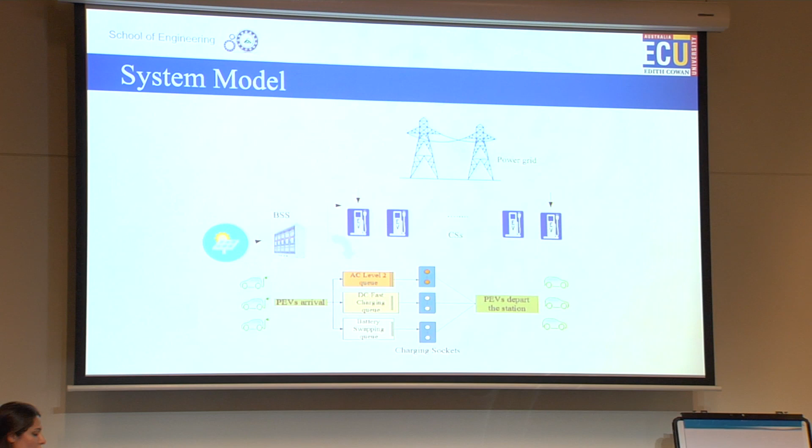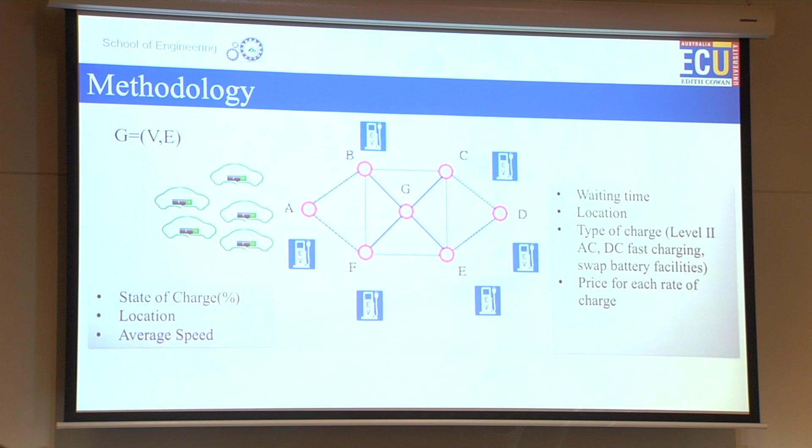As a mathematical representation of the system model, I consider the set of charging stations as a graph G(V, E), where V are the charging stations and E is the path, the distance between neighbor charging stations. On the charging station side, at real time I have this information: the waiting time of the queues, the address of the charging station, which is its location, the type of charge, which is related to the rate of charge for each option, and the related price information for each type of charging, AC, DC, and the battery swap also has a specific price.

And on the EV side, we have the state of charge of the EV, its location, and the average speed to calculate the remaining energy capacity of the battery for the distance from the source to destination.

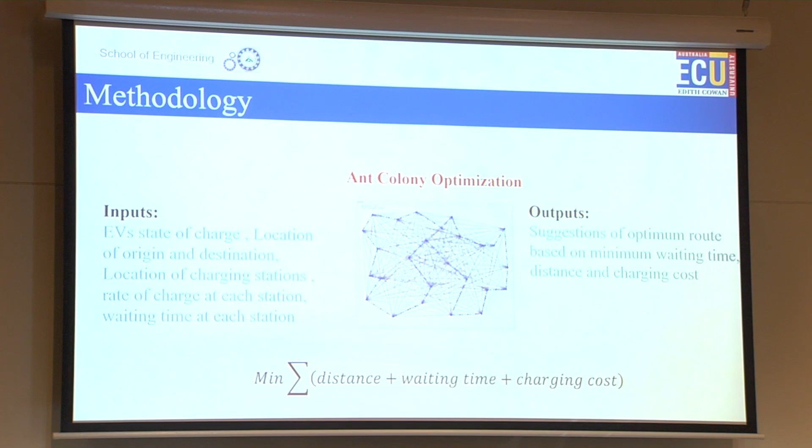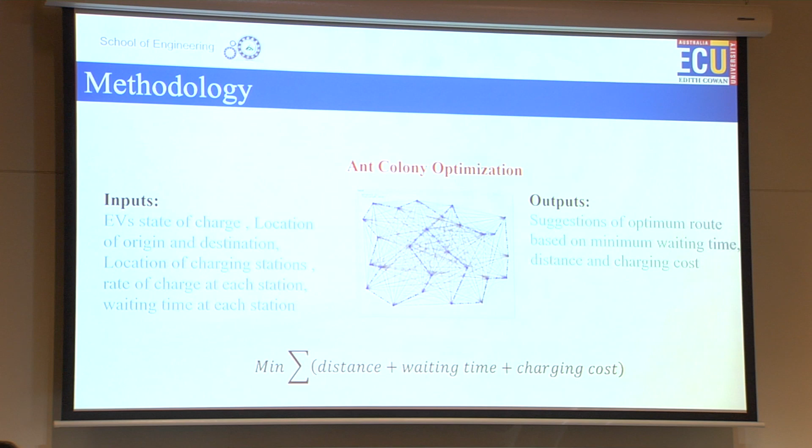The main objective for this part of my project was finding the optimum path based on the minimum waiting time at charging stations plus minimum distance from source to destination and minimum charging cost. For this, I have used an optimization model, and for solving my optimization problem, I have used ant colony optimization, which is a path-finding optimization solution that finds the best near-optimum path for different EV drivers when they want to go from the source to destination based on their selection of the charging type.

So as an input of the system, we have the EV's state of charge, as I said, in the EV's panel, and we have the source and destination, because based on that, I have to decide what would be the best option. And also we have the real-time waiting time for charging stations, implemented by a queuing model, that at each time slot is changing because of the number of EVs at charging stations. And on the output side, we would have the suggestions for EVs for the best option to go and charge.

For my simulation for this part, I have used the EV network from Washington because it was somehow similar to my system model, and in most of the charging stations they have used AC and DC for charging EVs, with multiple sockets for charging. I just added the swap battery for the charging station in my system model.

And the reason is that it's somehow a coordinated charging. So besides the random charging, going to the charging station only based on the distance, we can manage EVs to go for the best option.

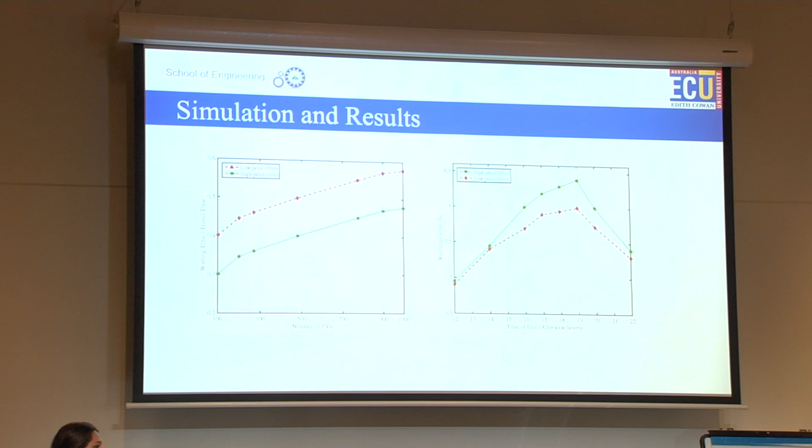Also, we propose a partial charging strategy at this stage, and we said that we can suggest EVs, instead of full charging at the charging station, especially at peak hours, go for partial charging with a higher price, but with less charging time, to decrease the waiting time at charging stations.

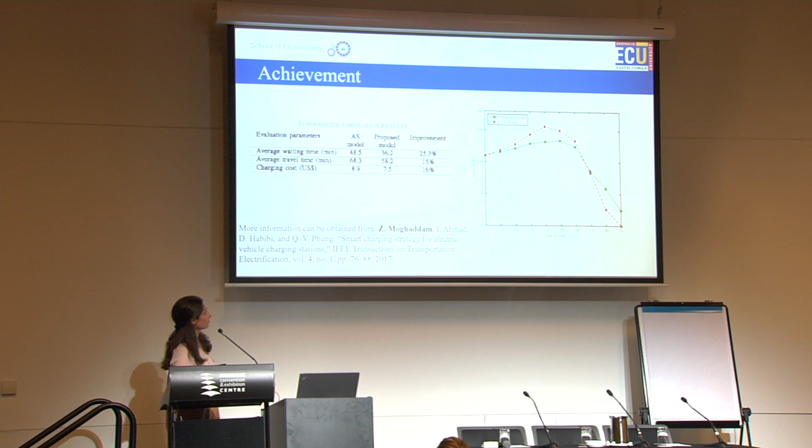And as the main achievement of this part of my project, we could decrease the total waiting time at charging stations by up to 25%. And we could decrease the overlap between the charging load and the load curve at peak hours.

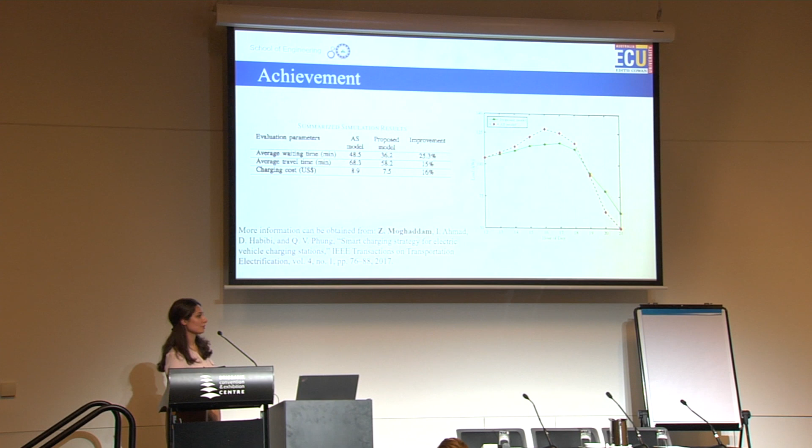This phase of my PhD has been published in one of the highest journals in electrical engineering, and for more information you can go to this link. And the good thing is that since last year, when it was published, it's been one of the top 5 papers in this journal.

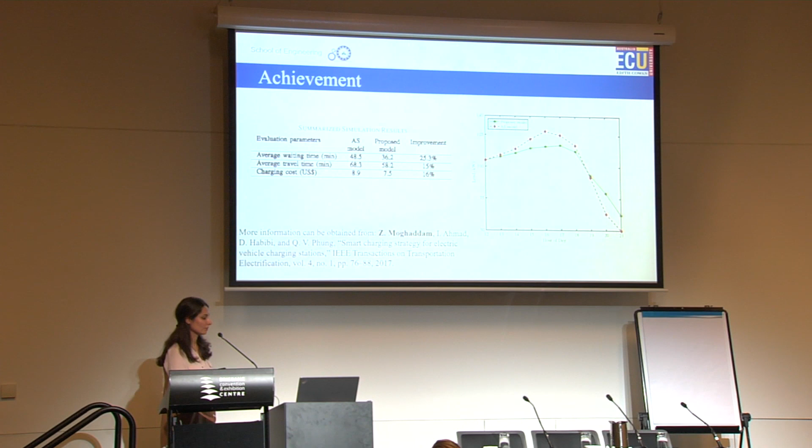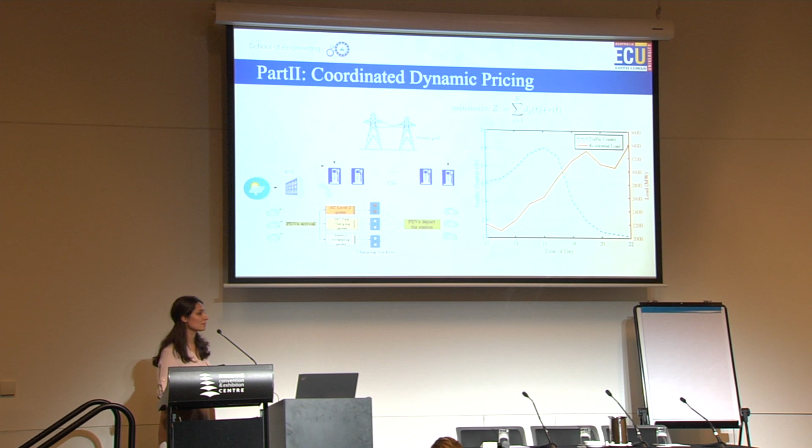For the second part of my project, I followed the same direction, to minimize again the overlap between the EV's load and the residential load at peak hours. The only thing that I have changed in my proposed model is the price of charging stations. And for the price of charging stations, I propose a coordinated dynamic pricing. For the coordinated dynamic pricing, I've considered rule-based instructions for the pricing model,

and the rule-based instruction follows the uniform distribution of the EV's load across all charging stations based on the maximum capacities of charging stations, especially at peak hours. And again, for the input of the system, I have the current time, the price of the current time, and the price of one hour before. And the price was changing every 30 minutes. It was online dynamic pricing.

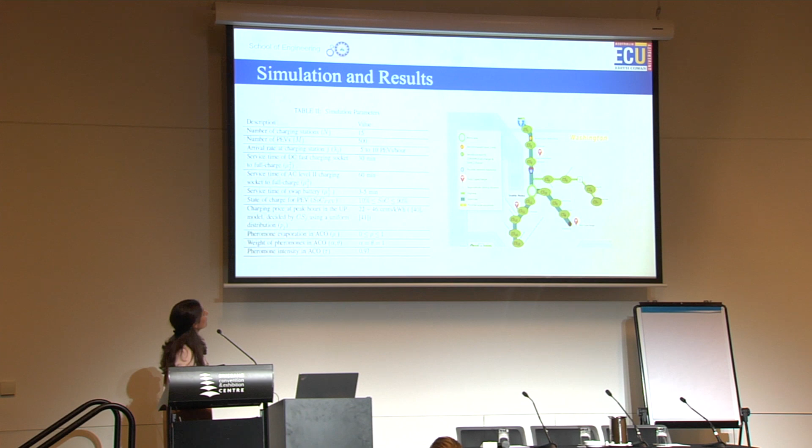Again, for the path finding at each time slot, which is 30 minutes, we updated the price information and found the best option for charging stations to go and charge. Again, for the simulation of this part, I have used the green highway of Washington, but for 15 charging stations and 500 EVs, and with the other parameters of the simulation I have got these results for this section.

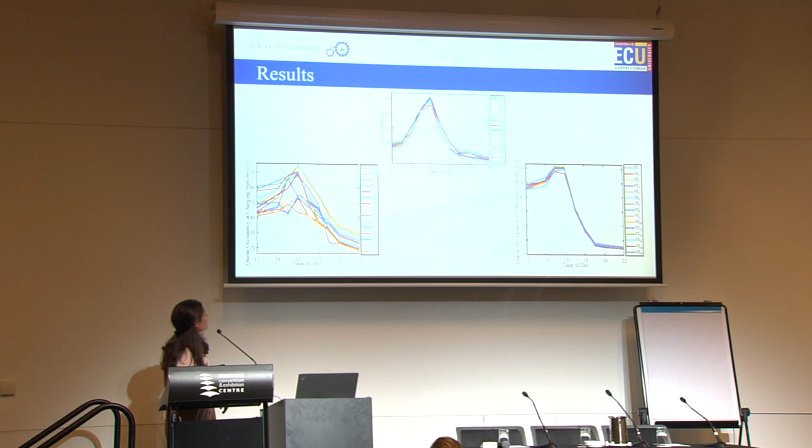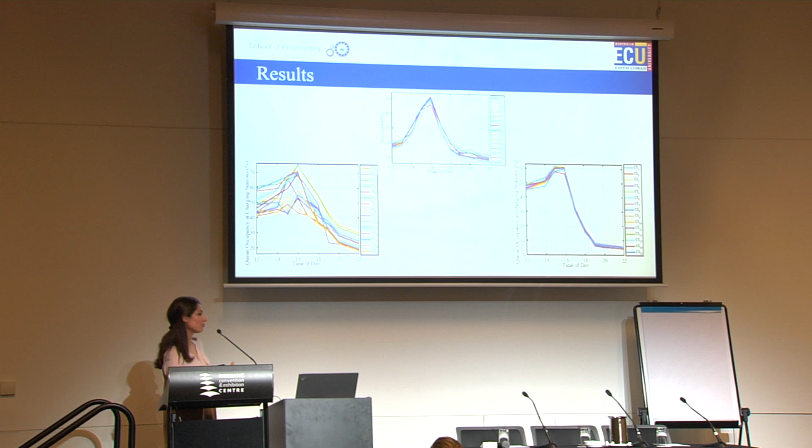The left graph is based on the queue occupancy of charging stations with an uncoordinated pricing model. As you can see, the price information is different at charging stations at different times of the day. But on the right side, I could achieve the coordinated dynamic pricing for charging stations, and this queue occupancy between the charging stations, as you can see, follows the uniform distribution for EVs, and they could charge before reaching the peak hours in the afternoon.

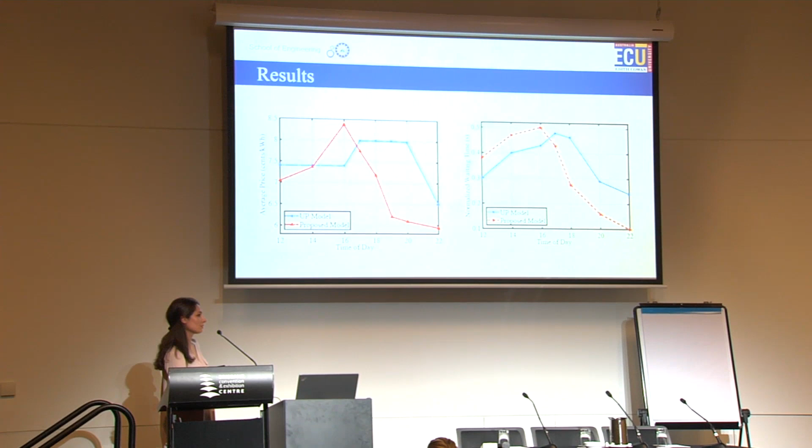And also for the average price, we could get the minimum average at peak hours, and for the waiting times also, as we charged EVs before reaching the peak hours, based on the pricing model, we could get minimum waiting times.

And for this section, I could achieve up to 67% of the average EV load during evening peak hours, which was significant compared to the existing results, and the probability of the overlap, I could improve it up to 46. Also, for this part of my PhD project, I could submit another journal paper, which is still under review.

As a summary of my PhD study, I can say that we propose a smart charging strategy which considered multiple options for charging EVs at each charging station with different price information for each charging option. And we also use optimization. We defined our research question as an optimization problem, and for solving that optimization problem, I have used a heuristic solution for finding the best path.

And for the verification, as I said, I verified my result with one of the best existing results in this area, and the simulation environment was MATLAB. Thank you for listening.

So a really quick background. I'm going to assume that everyone is pretty familiar with how batteries work. Hopefully that's a safe assumption if we're at an EV conference. But to compare the battery with the fuel cell, they're actually extremely similar. They're both electrochemical processes. The big difference is that with the battery, you have all of the fuel stored within the cell. And with the fuel cell, on the other hand, you simply keep adding your fuel as you need it, and you store that elsewhere.

And so with the hydrogen fuel cell, you store the hydrogen in a tank, and oxygen you most often take from the air. So that means that with the battery, if you want longer range, you have to put all of the components of the system in, like battery after battery after battery. And the fuel cell, if you want longer range, you just have to make the tank larger. So that's really a big distinction, that you can really decouple the power from the range.

So if we start to try to compare them side by side, in terms of what's important for mobility applications, you look at batteries: the fuel's widely available, even at home, and this is really the big driver for why EVs have been taken up so easily, because you need that charging network to go far, but the reality is you can meet 95% of your needs just charging at home and driving somewhere and coming back.

Whereas with fuel cells, you need to find somewhere that will provide you the hydrogen. And hydrogen is quite challenging to transport long distances, particularly because it's extremely high density from a weight point of view, but being a very light gas, it's difficult to put a lot of hydrogen on a vehicle and transport it to the stations. In some places there are hydrogen networks, like pipeline networks, and that could be a potential for the future. But for the most part, you have to truck it in, and that's been a real setback for hydrogen.

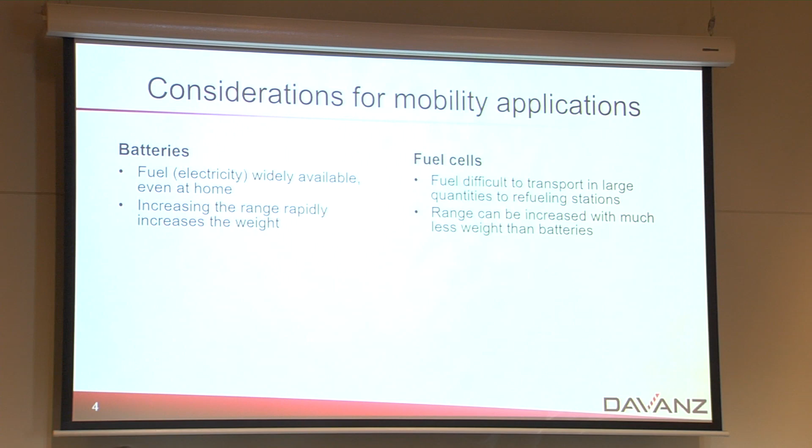As I mentioned before, the range: with batteries you can get a certain amount of range comparable to the hydrogen fuel cell quite quickly. They're quite similar at a small range, but as you want to get more and more distance, the fuel cell really comes out ahead because you're not adding anywhere near as much weight as you are to increase the range with batteries. And that's where you get into the whole issues of range anxiety. And cars are starting to make much bigger ranges, but it is coming at a price of a lot heavier car. With that extra weight, you then need more batteries to push that weight along, and it starts to be a circular problem.

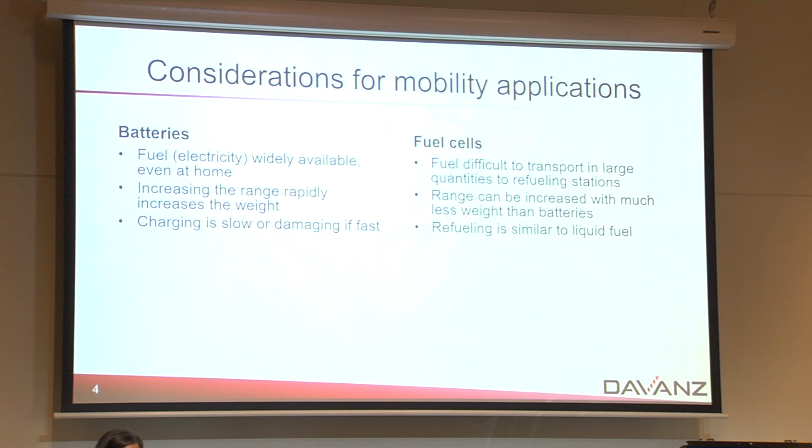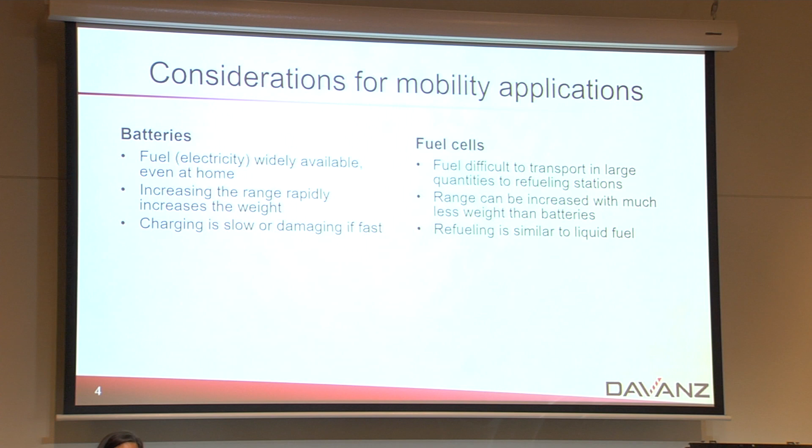Now, charging the batteries, one of the things that we keep hearing about is fast charging, because most of the time, if you're just leaving it home overnight, you can charge it, take the time you need. But if you're trying to get somewhere, then you want to charge it fast. So there's all this effort going into the charging networks to be able to pump energy in really fast, but most batteries really don't like to be charged that quickly. There are chemistries that can accept it, but the high energy chemistries used in the vehicles generally really don't like being charged that quickly. So you're shortening the lifetime of your battery if you do it.

Whereas with the fuel cells, refueling is pretty much like a liquid fuel. You just come in, you hook it up. It's a little bit different because it has to have a good seal with the gas and a bit more complexity, but the time it takes is very similar. You just pull up, do it, a couple minutes later, you're on your way.

Safety now, this could go on for hours if we start talking about the safety. As I said, I spent a long time in lithium-ion batteries, a lot of time in hydrogen. Both of them have some pretty serious safety concerns. Both of them can be managed with the right engineering, treating your system the right way and making sure that it's maintained. So rather than go into all the details of what the differences are, I'd say they're different. Personally, I'm probably more afraid of the lithium-ion batteries, but we can probably have some other talk some other time about what the safety differences are.

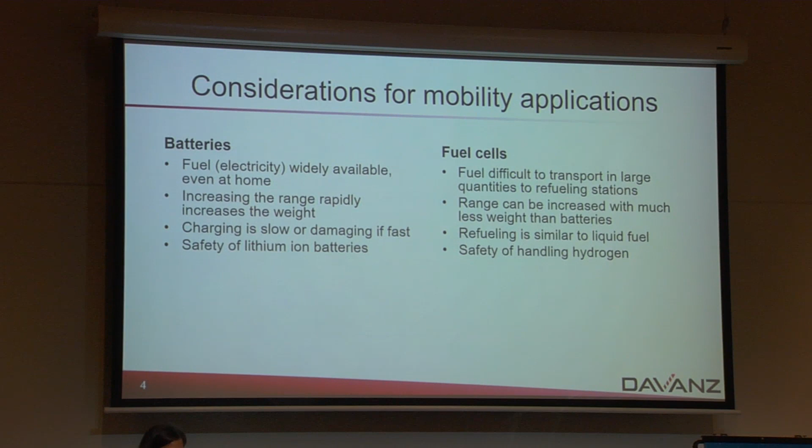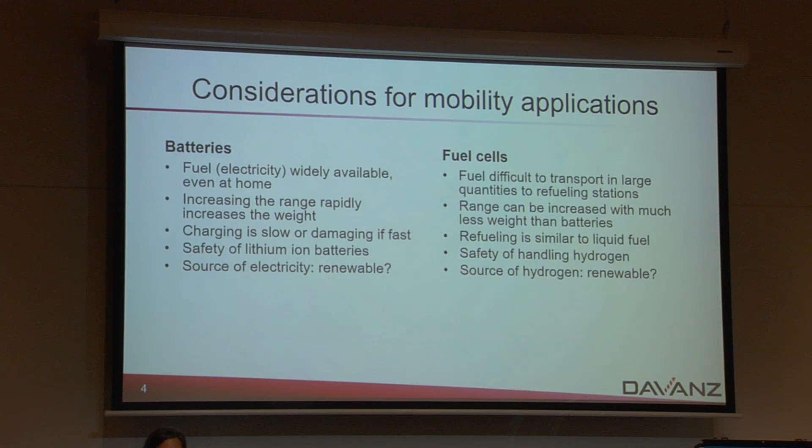Source of electricity and source of hydrogen. Now, this is another big "it depends" sort of thing. Electricity, if you've got coal-fired power plants, then your EV is not any cleaner, and in fact, you're just putting more carbon into the air. And similar with hydrogen, almost all hydrogen at the moment is produced from natural gas, and so it's effectively a fossil fuel. Not as nasty as coal, but unless you're actually making the electricity to put in your battery or to electrolyze water to make hydrogen, there's really a question around the actual impact on the environment.

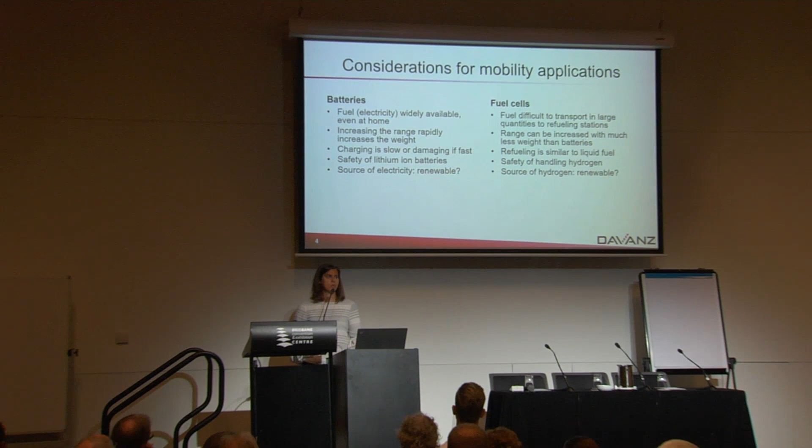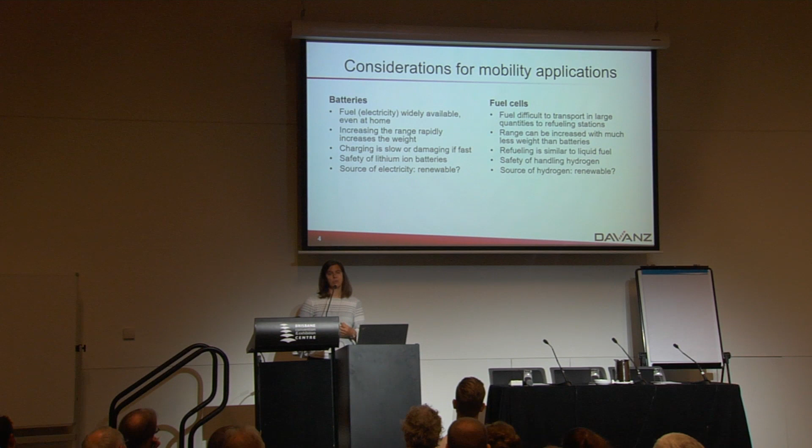When we were doing hydrogen fuel cells, when I was in it back in the 90s, the focus was entirely on reducing the immediate emissions. It was more about cleaning up the cities. Back then we had cities in California, Los Angeles, that were extremely polluted and you couldn't breathe, much like Beijing now. So that was our focus, but over time the focus has changed to be more globally about climate change.

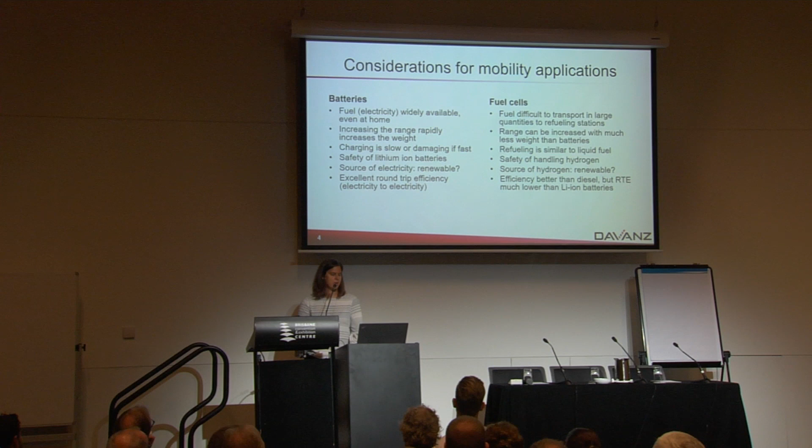So then you get the round-trip efficiency. Now, if you're only worrying about emissions, it's pretty much the same for batteries or hydrogen. But if you're looking at the round-trip efficiency from an electrical point of view, the battery is very high. So you get out almost everything you put in.

Now, the efficiency of fuel cells, back then we were comparing to petrol and diesel, and so the efficiency of the system is much better than those. But if you're looking at it from a purely electrical point of view, renewable electricity turned into hydrogen, turned back into electricity, the efficiency is quite a bit lower than lithium-ion batteries.

Cost and lifetime. Now, this is another one. It really depends who you're talking to and what you're comparing. So I'll just leave it at it depends. It needs a lot more details to really discuss the issues around the cost coming down with batteries and the cost coming down with fuel cells, as well as the lifetime implications, because for both of them it depends quite heavily on exactly how they're designed and even more on how they're used. So I'd say probably more or less similar, it depends. Each one can be tailored to suit what you need.

And then recyclability. Now, this is often forgotten about. The recyclability of lithium-ion batteries is very poor. It's a big issue, and it's one of the things that really bothered me when I was spending so much time working on lithium-ion batteries, is that with this explosive growth in the industry, we're going to have such enormous amounts of waste coming up that it's going to be a huge problem to recycle, and even the parts that aren't recycled, just to dispose of all that. A lot of toxic materials that are very difficult to recover. Fuel cells, on the other hand, have much more benign materials, much easier to recover, a lot easier from the recyclability point of view.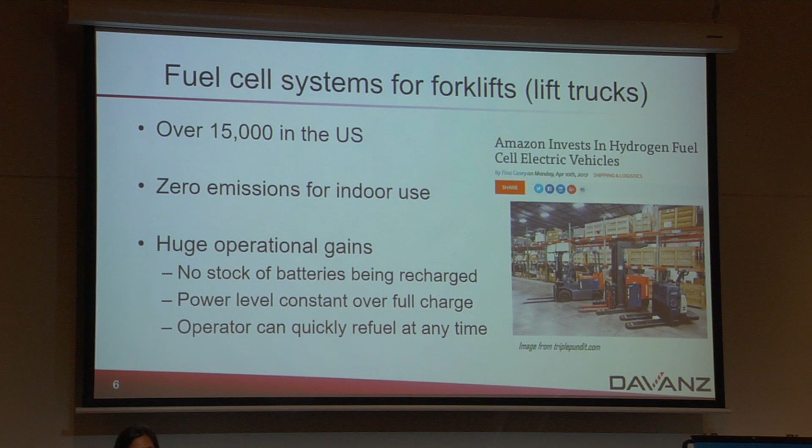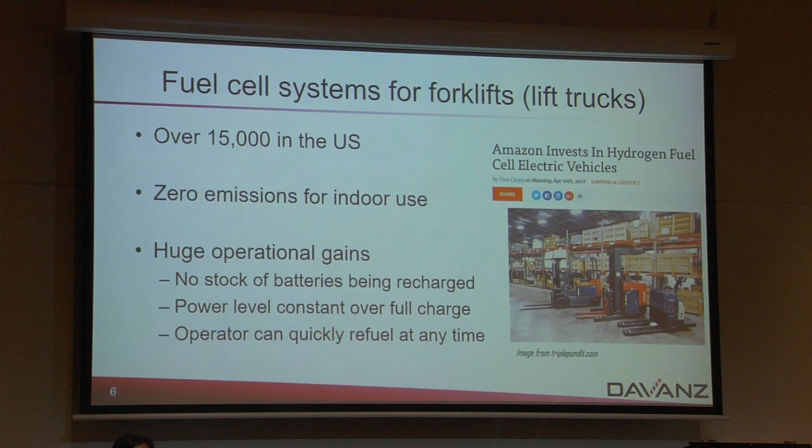They apparently had these big storerooms of batteries being recharged, and so they're able to just get rid of that. So it's extra space, a lot less cost, not having all this excess hardware sitting around. And there were also issues where everyone would come in the morning, get their forklift and their battery, and all the batteries would die at the same time, so they'd all run back, and there'd be this big traffic jam trying to get the batteries swapped over.

And then with the batteries, as the day went on, they would get weaker and weaker. So a box they could lift up in the morning, they couldn't lift up in the afternoon. So again, another big issue.

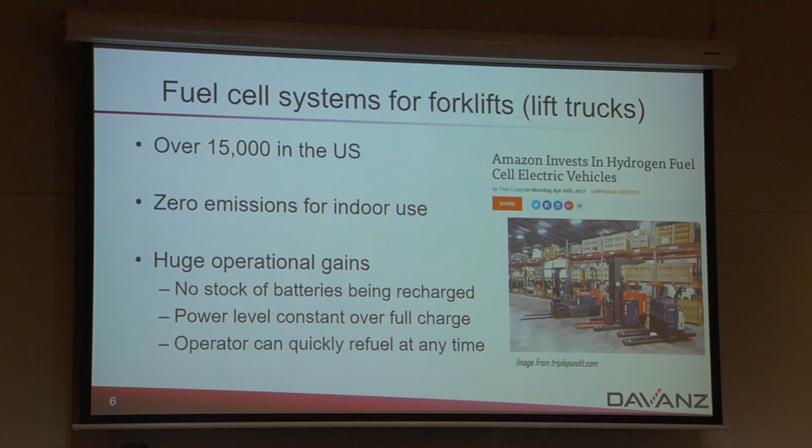And so with the fuel cells, they were able to just eliminate all these issues. It's exactly the same power all the time, no matter how full the tank is. The operator, if they have 2-3 minutes, they can stop off and refuel whenever they feel like it. And they just don't have all that extra infrastructure to charge batteries.

Get into fuel cell systems for the personal vehicles. Now this is where it's, I guess, really struggled to take off, and where Daimler was saying by 2005 they'd be churning out 100,000 a year.

Back then, we really didn't see batteries as a viable alternative. The lithium-ion battery was only first commercialized in 1991, so it was still in very early stages, very poor performance at that point. So it just wasn't a viable alternative. We only considered petrol and diesel to be our comparison.

So fuel cell systems, they have come along quite nicely. There's quite a number of them. I've just posted up 2 here, for example. Toyota Mirai, they're going to be bringing in a small amount for trials pretty soon.

They do have a small battery, so these batteries can then provide a bit of boost and acceleration, regenerative braking, but you're not going to go very far on 1.6 kilowatt hours. However, the total range, 500 kilometers for the Toyota, and the Hyundai, they've really pushed the range to 800 kilometers.

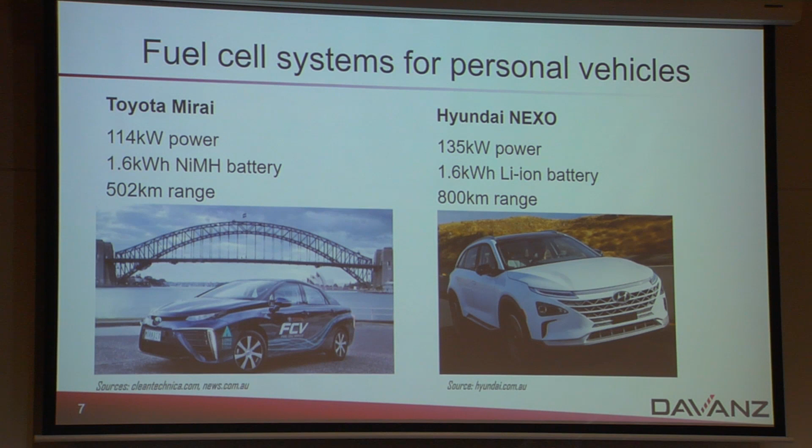Now, what's interesting is Mercedes. When I was leading the battery integration into the F-Cell 15 years ago, we kept trying to tell management it should be a hybrid, and they kept pushing back and saying, well, no, if it's a fuel cell vehicle, it's a fuel cell vehicle, no battery. And apparently in between, the engineers have finally won out, and they've made a plug-in hybrid.

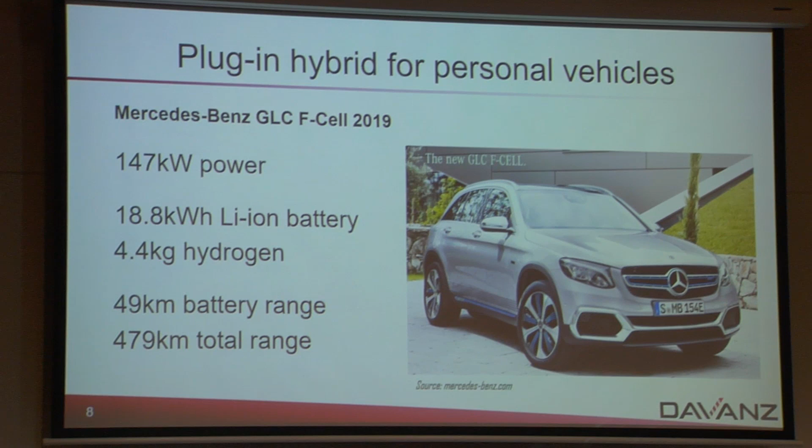So this has a pretty solid power, 147 kilowatts, and they put an 18.8 kilowatt-hour lithium-ion battery in. Still have quite a small tank of hydrogen. And so with this, you can do 49 kilometers range just on the battery, and close to 500 kilometers with the battery and the fuel cell.

And this becomes quite a different value proposition, because if you've got 10, 20 kilometers to go to work, you can do all of your day-to-day driving just on the battery, same as any other battery vehicle. And then when you want to go far away, you don't have any trouble with that range anxiety. You can refill in 2 minutes and have all of these benefits. So it'll be really interesting to see how this goes. They're just putting it on sale now.

Now, fuel cell buses, that's really one area that has taken off quite a bit recently. Now, this is interesting. You take the primary power from the fuel cell, and then the battery provides acceleration and it's recharged through the braking and can be recharged through the fuel cell.

But compared to just having a battery bus, you have much higher range. If you want more energy, longer range, then you just add tanks of hydrogen. You don't have to add the whole system. So with that, it's got far lower weight. You can carry more passengers, because most of these are limited by how much weight you can drive on the road. 10-minute recharge, and it can travel any route.

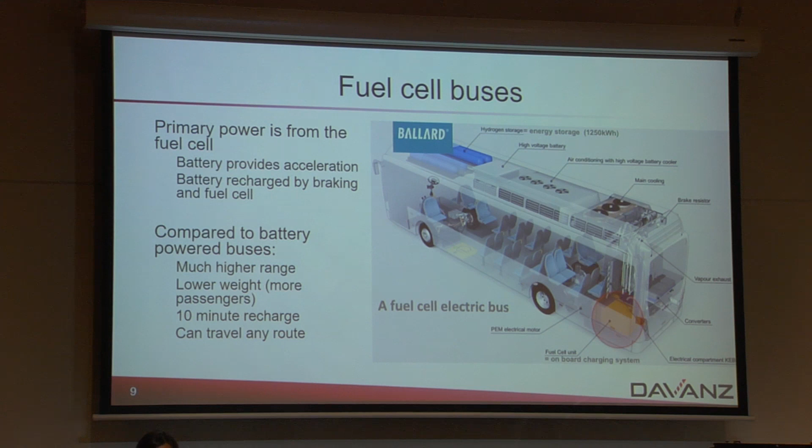So there's a lot of talk of having quick recharge at each station or things like that. But what if your road's being ripped up and you need to take a detour? Then your battery bus won't be able to go there. So the fuel cell bus really allows completely normal operation behavior with the benefits of zero emission and electric drivetrain.

Another really interesting application that's come up is a range extender for fleet delivery vehicles. A lot of people are switching to electric vehicles. We heard a talk this morning that was doing that, but they are limited in range. Watching the talk this morning, it was 250 to 300 kilometers that their systems could do. To get more range, you start adding a lot of weight, then you're limited in how much goods you can actually deliver, so it starts to be a negative proposition.

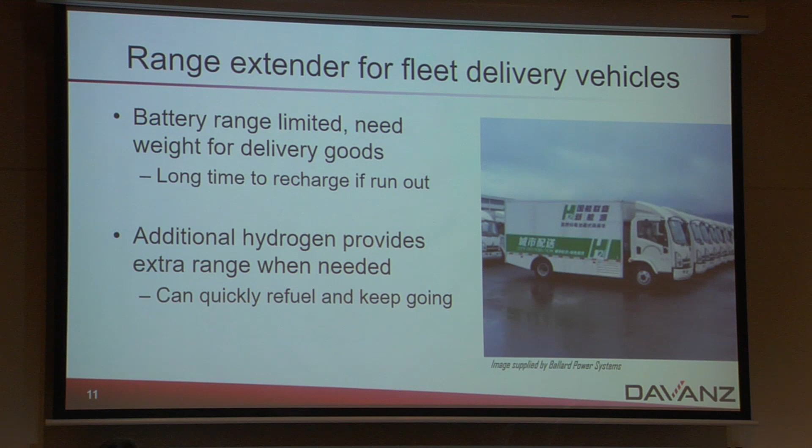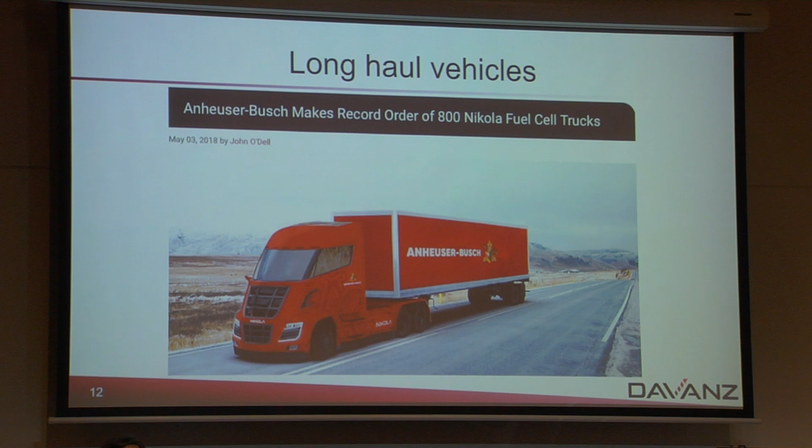Now, if you add a fuel cell, on the other hand, you can keep the primary battery system, but have that extra fuel cell capacity that will allow you to go a lot further and start to make intercity deliveries and things that you weren't able to do with the pure electric. And then there's the long haul, and that's where fuel cells really do start to benefit, with the systems providing more range.

And fairly recently, this company, Nikola, named after Nikola Tesla, there was maybe another company named after the same guy, but they're making fuel cell long haul trucks and getting good orders. And they've also got an interesting business model because they're installing refueling stations at strategic locations so that these trucks can always know where they can refuel. So we'll have to see how that company goes.

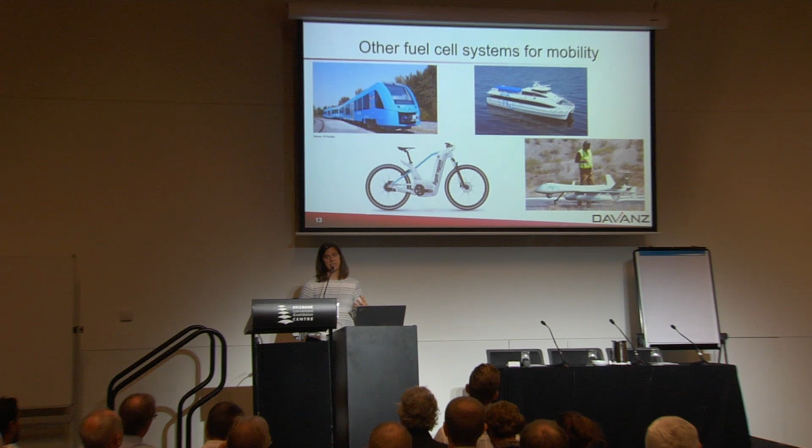I didn't want to talk all day, but there are a lot of other fuel cell systems. Trains have now been put in operation, ferries, electric bicycles with fuel cell power, and drones, so unmanned aircraft are a big opportunity as well. Again, that's where the weight really starts to be important, and the range becomes important.

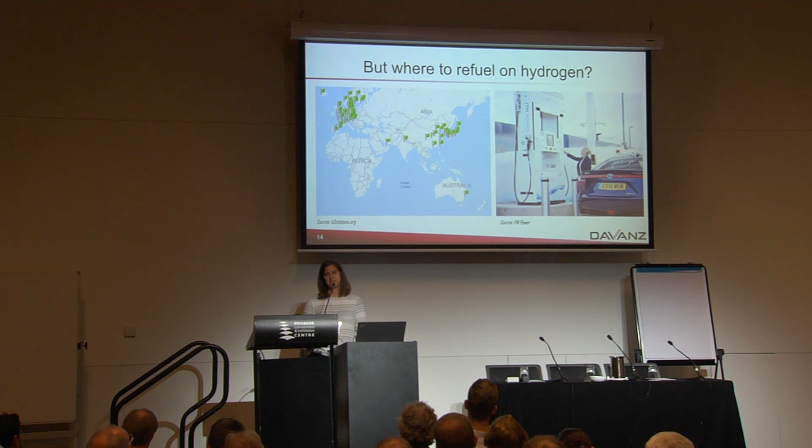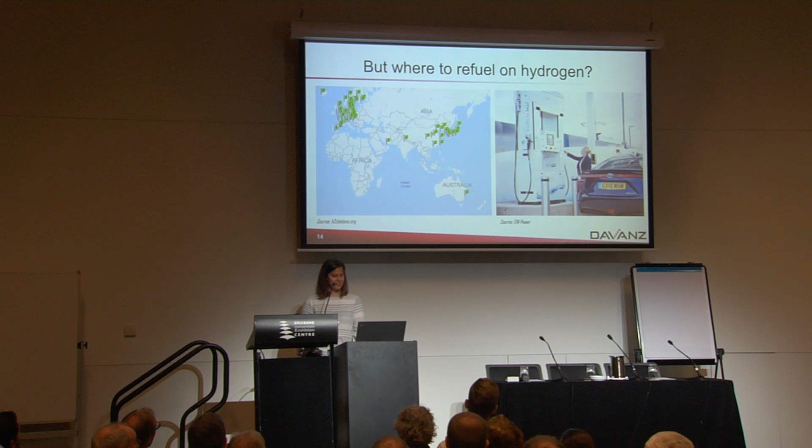So where do you actually refuel your hydrogen vehicle? So I convinced you all to run out and buy your Mercedes-Benz or your Toyota. Where are you going to refuel? Well, it's not looking good in Australia. There's one Toyota refueling station in Sydney, but otherwise you're out of luck. It's really taking off in Europe, in China, Japan, South Korea. These places have a lot of opportunities. A lot of cars are starting to be sold, but in Australia, it's maybe not quite tomorrow that you'll be able to buy your fuel cell vehicle and drive around the country.

Australia, though, up until probably 2 years ago even, there was still very little attention being paid to hydrogen in Australia. And it's really interesting that just this August, there were 3 major reports released funded by the federal government. The focus of these reports was looking at how Australia can benefit from this huge upsurge in hydrogen activity in the rest of the world. And so their decision was, well, we should really push exports of hydrogen. How can we produce hydrogen and export it? Which is a very logical response.

But I find it is maybe a little bit lacking, because we could also be looking at how we can maybe adopt some of these things and see if they make sense here, rather than just simply be an exporter of natural resources.

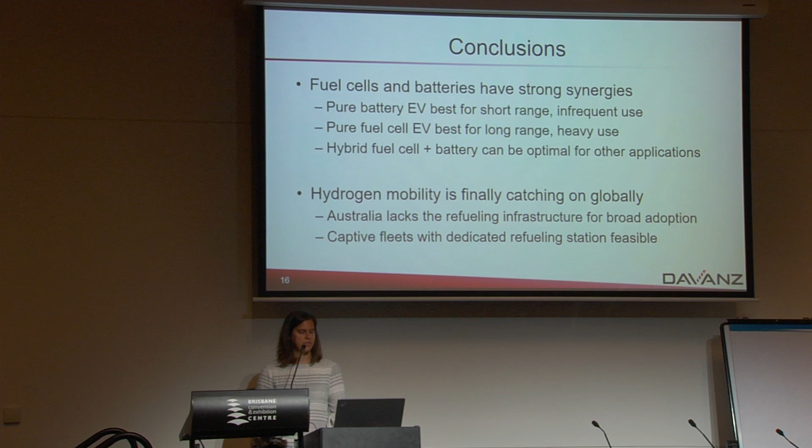So I'll just summarize some conclusions. Fuel cells and batteries have a lot of synergy. One thing I may have forgotten to mention at the beginning is that they use completely the same drivetrain. Huge amounts of components are the same, so as costs come down for battery vehicles, all those components will also be cheaper for fuel cell vehicles. The pure battery electric vehicle is really good for short range, infrequent use, your day-to-day driving, an hour or two a day. The pure fuel cell electric vehicle is really best for really long range, really heavy use, where you want to be able to refuel quickly and go a long time between. And then the hybrid fuel cell battery is really what I like. That could be quite optimal for a lot of other applications.

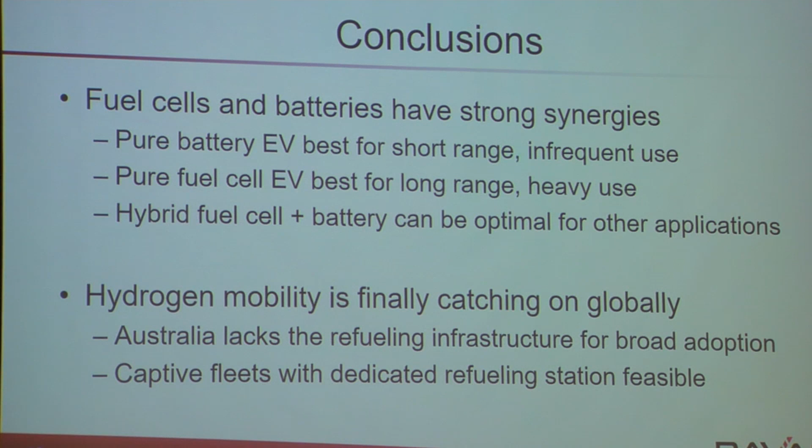Hydrogen mobility is finally catching on globally. It's no longer 10 years in the future for a lot of places. Australia really lacks the refueling infrastructure for broad adoption, so I don't really see it happening here anytime soon. It might still be 10 years away for a while yet. But there is certainly an opportunity for captive fleets with a dedicated refueling station, and that could be quite feasible and beneficial for certain applications. So that would certainly be interesting to start looking at.